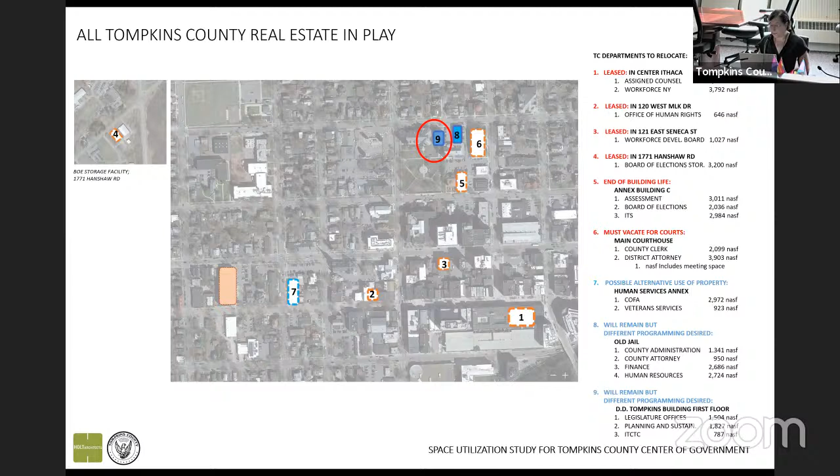And with that, we looked at what is remaining. We have the Human Services Annex, which is number 7. We have the D.D. Tompkins building, which is number 9, and we have the old jail, which is 8. So after we remove the leased space and the 2 buildings that programs need to vacate from, we are left with these 3.

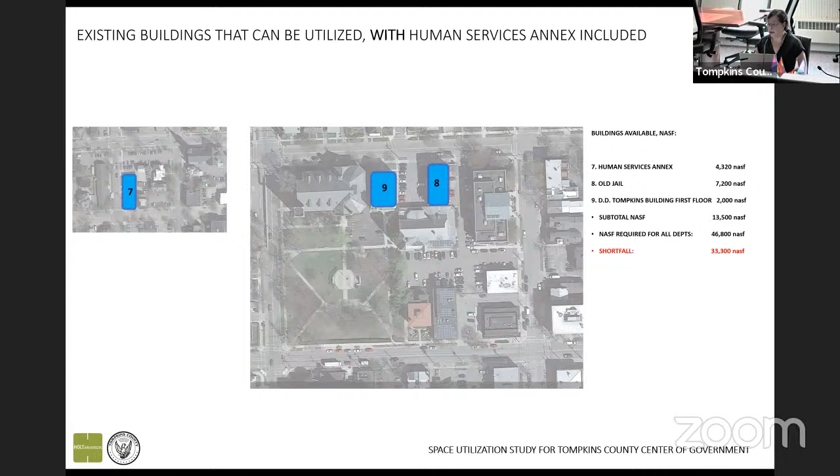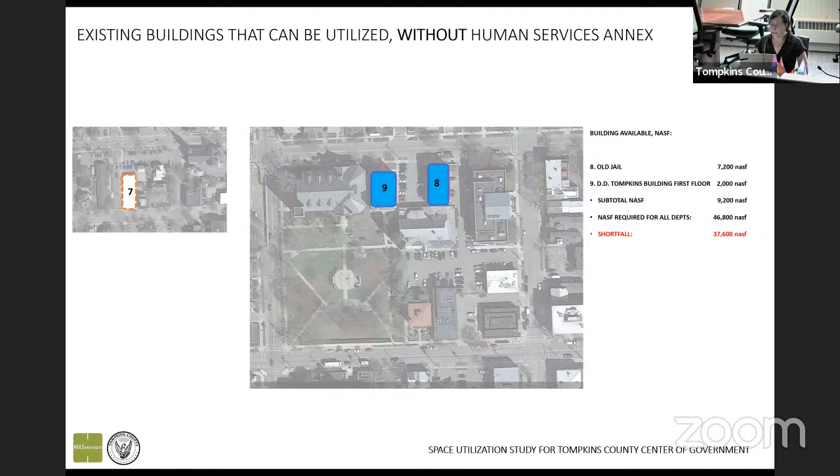And if we look at the net square footage required for all the departments, we have 46,800 approximately. And that gives us a shortfall of 33,300 net available square feet. And if we look at the program without the Human Services Annex, we have a shortfall of about 38,000 square feet. So we need a place for these departments to be located. And so within the next 3 slides, you will see 3 options that we are considering proposing to you.

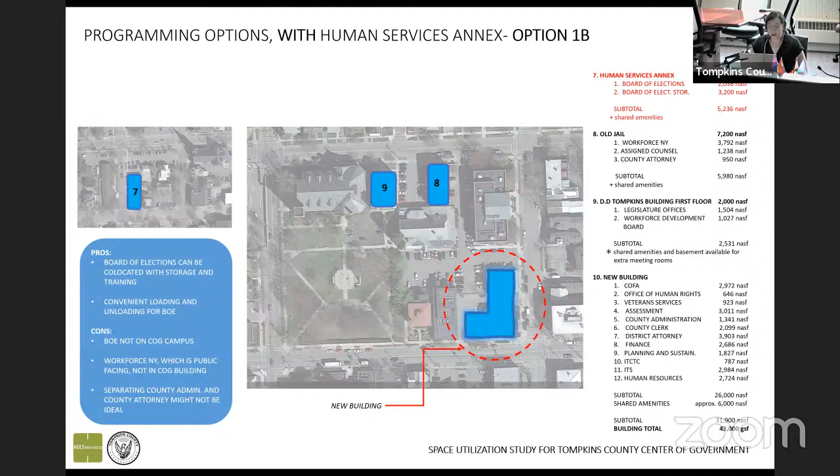The next option that I would like to review is option 1B. We're still keeping Human Services Annex in this scheme. And in this one, we are locating the Board of Elections and their storage in the Human Services Annex. That is a nice solution potentially, because the Board of Elections leadership has said that it's very important to them to be adjacent to their storage. They would like that. And it would be very convenient to be unloading and loading the voting machines. So there are a lot of benefits to having the Board of Elections and their storage in one building.

So that is really the only difference. In that case, we bring COFA, Human Services, Office of Human Rights and Veteran Services into the new building. The pros of this, I explained, about the co-location of Board of Elections with their storage. The cons is that the Board of Election group will not be on the center of government campus. And this one also has a couple of the same cons as the previous slide. This option also creates a 43,000 square foot. Yep.

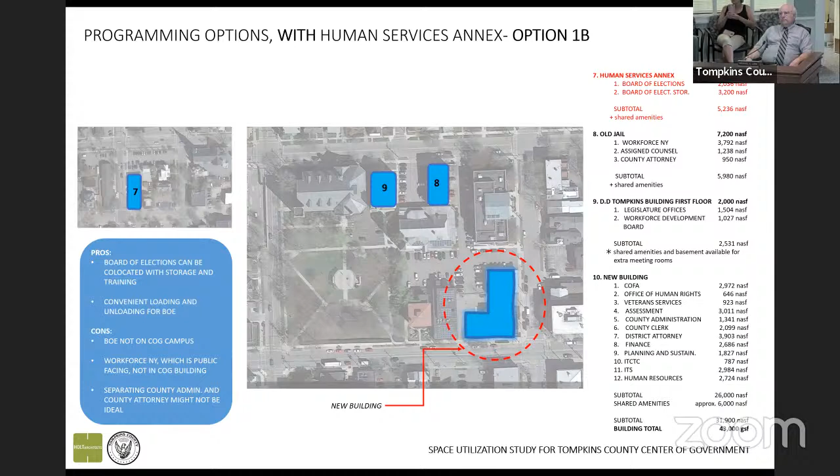Cindy, could I just ask a quick question? Sure. With the two variations of the center building, with the smaller one, how many floors, and with the bigger one, how many floors? So the smaller one is about a 43,000 square foot building. If we looked at a building with about 10,000 square feet per floor, this would bring us to a 4-story building. If we went to the next scheme, it would likely need to be a 5-story building. Sure.

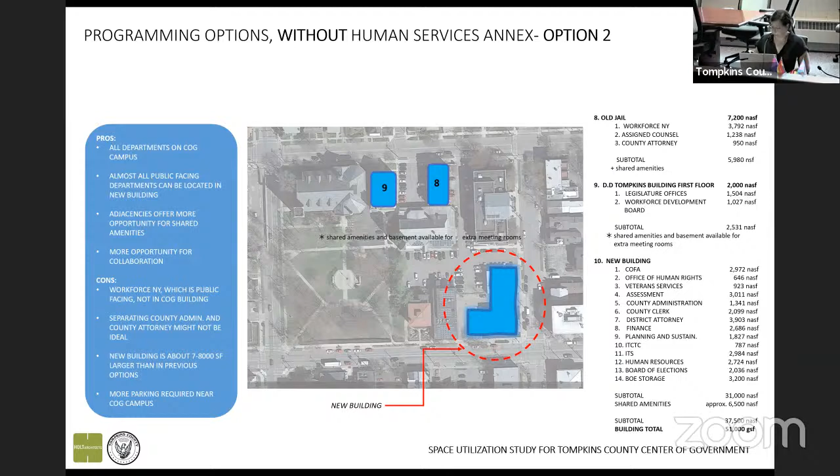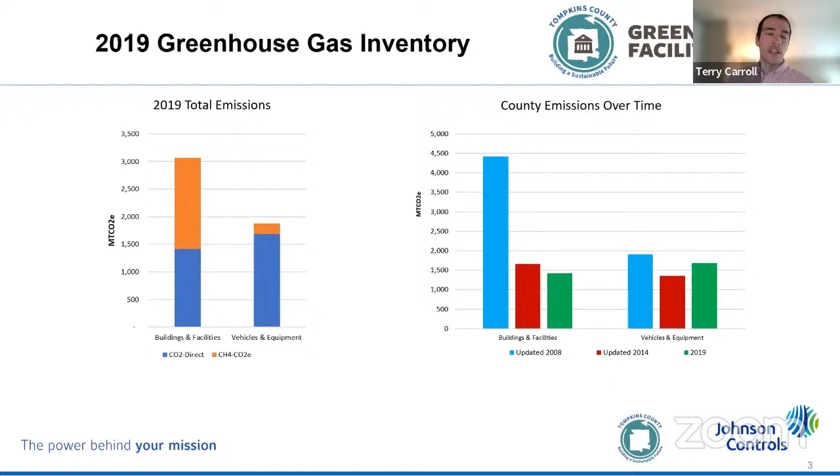That chart on the right shows the story that Arel has talked about. Since that partnership with Johnson Controls, we've seen a pretty steep decline in building emissions. With that said, there's still a long way to go. So, if we go to that next slide, Chris, we can see some of the efforts that are going on in Tompkins County as it relates to sustainability.

So we're on the cutting edge in a lot of ways when it comes to sustainability. And I think this project is another example of that. There's elements of this that are going to be leading in the state. And that's something that we can talk about a little bit later as well.

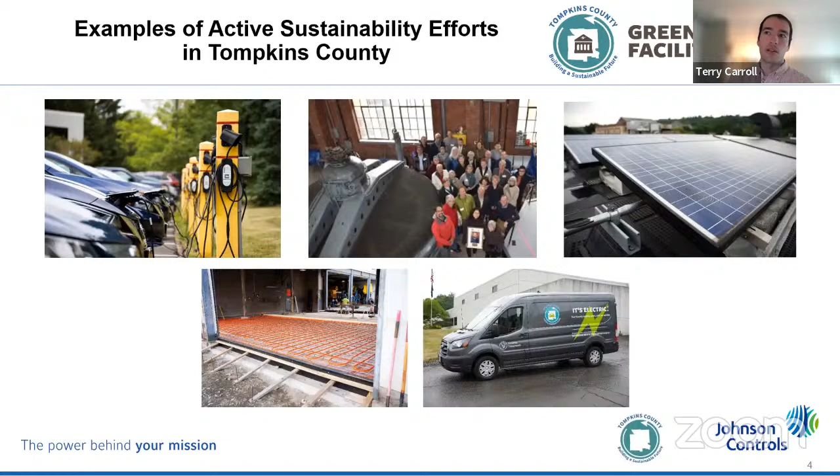And this is some of that background that I referred to earlier. 2005, that project I indicated. Then we did a phase 2, main courthouse. Phase 3 was public safety building. And then next slide. In 2021, that's when we started preliminary analysis for the phase that we're talking about. And at that time, we came up with about a $30 million project. That was during COVID, but a lot has changed since 2021 as far as the market and pricing.

In 2020, the county adopted the Green Facilities Initiative with those goals that Terry was referring to. Last year, we brought to this committee the preliminary assessment and what those phases and projects would be, and then started this Flex Tech study and the detailed engineering late last year. It was December, and culminated about 4 weeks ago. And then this year, the detailed engineering, which has developed the actions that we're proposing at this point for our phase 1 project.

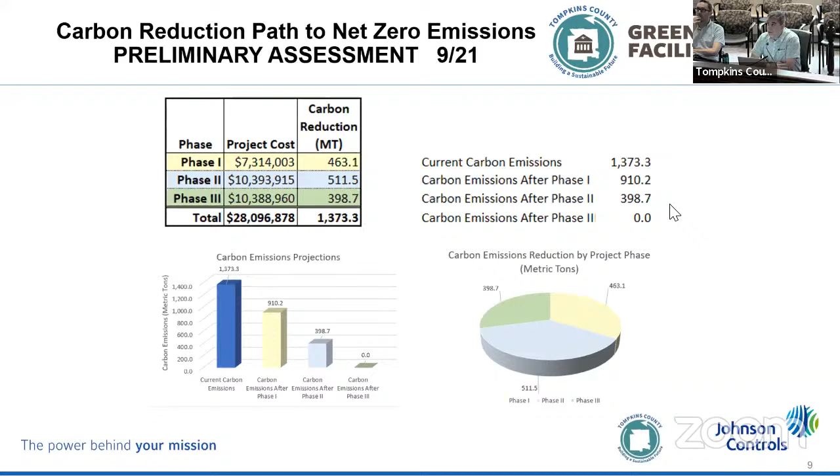As I said, we then started the detailed engineering, and what has changed is several things. The pricing has gone up significantly in certain areas. And so the deliberations that we've had as a team, which included myself, Terry, Alan in our office, as well as Johnson Controls, multiple meetings as we've gone through each of the facility improvement measures that were shown on the previous slide, and then looked at really where the priorities are.

If we're trying to achieve carbon emission reductions, which of those improvement measures will really give us the most bang for the expenditure? And so that's what's resulted here. We dropped out certain projects either for future consideration or that it just didn't make sense at this point to do.

And we did move up a project, and it's harder to see. In the handouts we provided you, you can see the color distinction, but the last item there, rooftop unit replacement, was initially in the previous assessment as part of phase two, which we indicated on the bottom. All of the other ones above that were original phase one, but not all of the items in phase one are included here.

And really the big ones for us are the geothermal and the VRF, which is variable refrigerant flow installation, which would be at mental health. The geothermal, just so you know, would be at the Public Works facility. And initially it was proposed to just do partial geothermal, which wouldn't get us off of natural gas entirely.

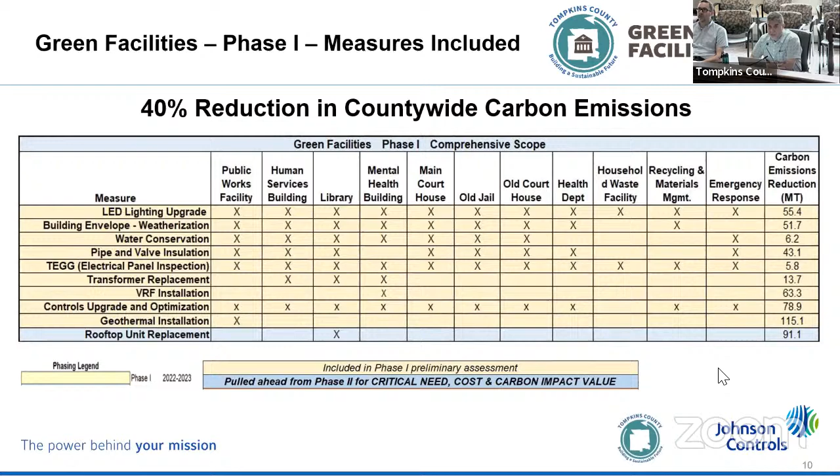All right, we just did that, so that's good. If not, we would have done it at the same time. But Randy, we can't hear you. You got to use your mic. So I was asking about the roof after they took the units off. Right. We actually replaced almost all of the roofing at that building about 2 years ago, which was perfect.

And those are just some graphics. The top left is the variable refrigerant flow unit that would be going into the mental health building. As I said, 40-some would replace existing heat pumps. The slide on the right is LED lighting. We're all familiar with that.

Over the years, by policy, any improvements or additions that we're doing in existing buildings, like the addition at the Human Services Building for the conference room, we put in LED lighting. Or if we have to change out an existing fixture, we go to LED, but we haven't done wholesale upgrades of existing lighting beyond what we did in 2005, 2006 of going to T8 fluorescent bulbs.

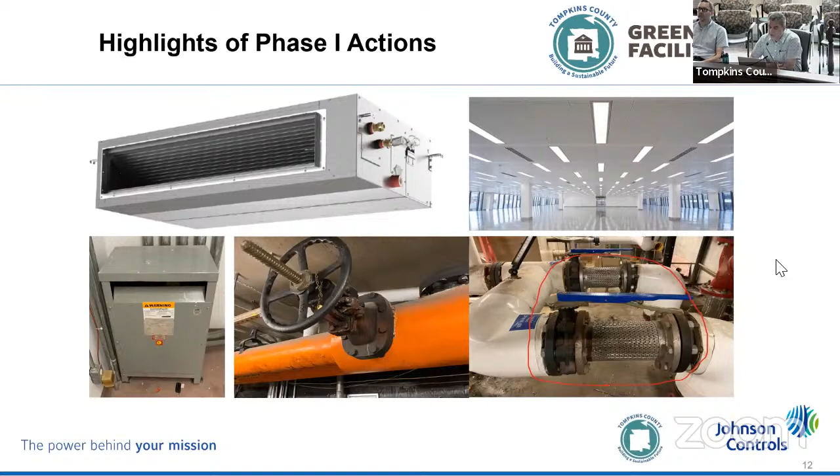The lower left is transformer replacements. The one in the center is insulation. I think both of the next two are basically insulation of piping. All right, we can go to the next slide.

Something that we mentioned earlier, setting that gold standard for counties, I think for municipalities across New York State, really demonstrating that leadership that governments can often project and help inspire others within their communities. It really has a focus towards renewable energy, so a lot of our efforts are towards electrification of heating, acknowledging that for the county, we're able to make 100% renewable energy claims thanks to some of the arrangements we've made with Waterloo and our energy procurement strategies, but also acknowledging that New York State has a goal for all electricity to be renewable or at least emissions free by 2040. So we're heading in that direction.

The total metric tons of carbon is going to be 524, which is a significant amount. That public works facility being net zero, like I said, it's going to be leading the region, if not the state. And we're also anticipating some dramatic public health benefits: removing combustion from buildings, making them tighter, making them more comfortable. They've all been shown to have health benefits over time. And so that's something that we're really happy to do to make sure that our staff are being well taken care of.

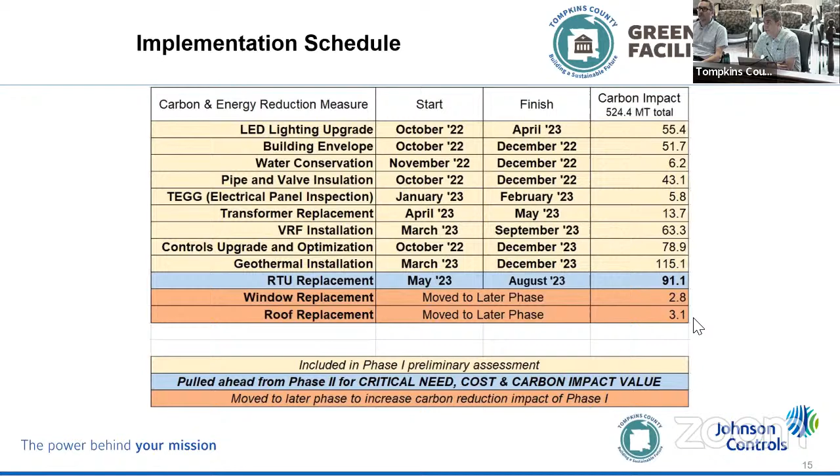That's just a rough schedule I indicated before. We don't need to spend a lot of time. You have that in your handout. The most immediate ones that could be started would be October, LED, building envelope. The geothermal, lot of engineering still left to do. So that's going to be this year into next year, completion December of 2023. We can go to the next slide.